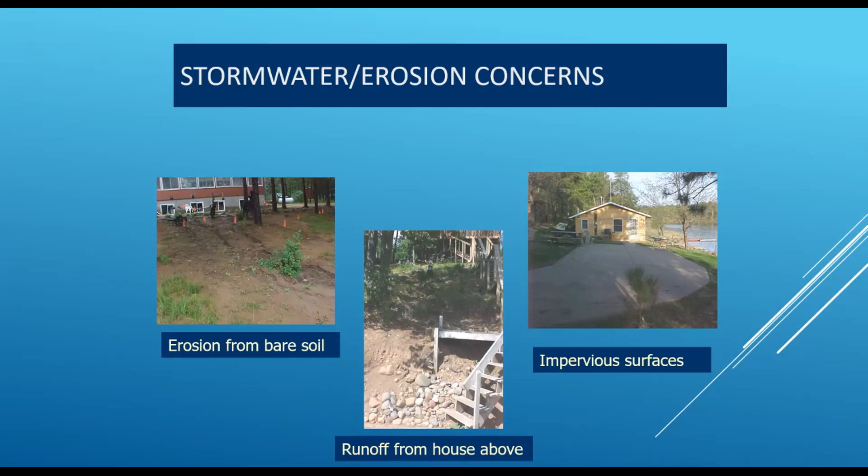There's one that was part of a new construction, and you have to think about when you do some building, or I should say some additions in this case, it wasn't specified that the contractor did any type of soil stabilization, and they did what they were supposed to. They left, and here's what we get. And this completely accelerates and has a real issue, and it needs to be stabilized quite radically because it's pumping a lot of stuff to the lake. Next slide, please.

And these are a couple of different examples of what you can do without erosion control, and it really can cause a huge, huge problem. There's some major gullies, and it had some major costs to fix those up. Next slide.

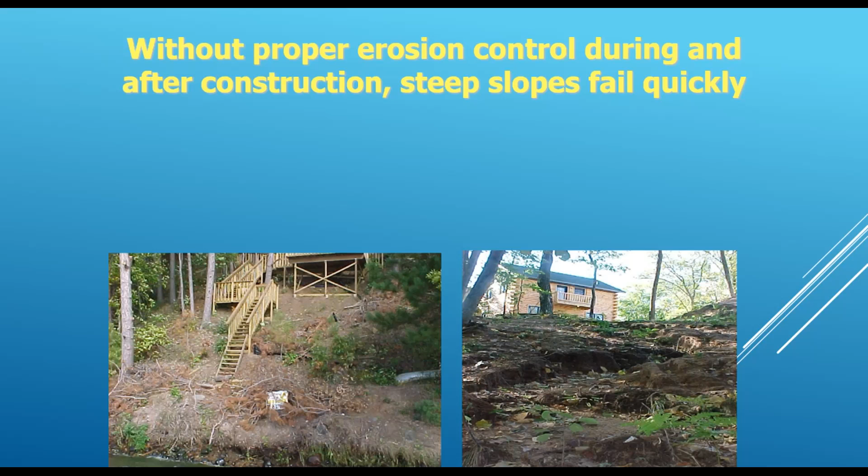This is just a plain old simple runoff on a driveway, and it's a well-established cabin, been there for many years, but there are issues and there are volumes of water coming from above that really should be intercepted and moved off into a place where the vegetation can use up the nutrients and the water can infiltrate.

And I will also mention, I don't have a slide of it, but when you have an excessive amount of runoff or you do a little extra fertilization or you have bare soil, you can actually create a mini algae bloom in front of your property. My guys have been out on the lake. It's amazing. They'll be coming along and the water column will be clear next to shore, and then all of a sudden you hit algae. Well, what's there? Oh, that was a property line. Then there's algae for 100 feet. New property line, the algae stops. So it's very, very important to think about what you can do above your cabin and above the lake for stabilizing that for water quality. Next slide, please.

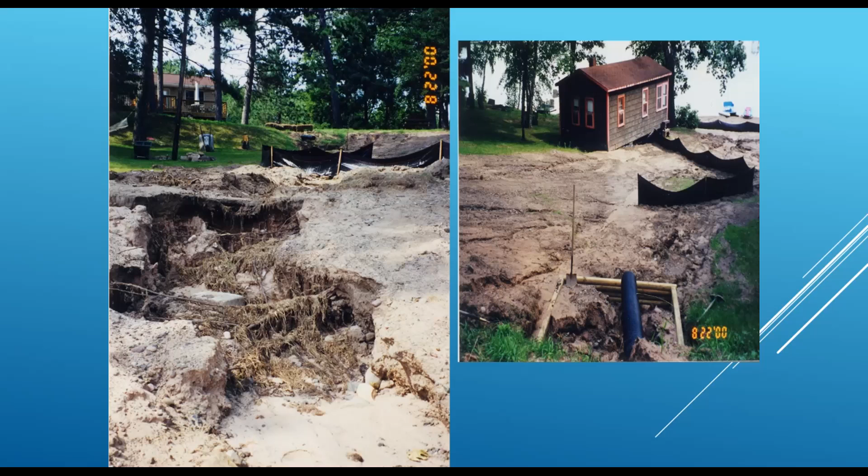This was a dandy. The guy thought he was doing the right thing. He put an addition on his house. He had a ton of hard surfaces, and he thought, oh, geez, I'm going to put it all together in one collection point and then just run it down to the lake. Well, that was the result when you put too much volume together. It was not a pretty sight, and he spent thousands of dollars fixing it up because he didn't think about what he was doing ahead of time. And as you're adding hard surfaces, you really want to be cognizant of that increased runoff.

And by the way, Burnett County, along with Bayfield County and a few others, did a book a bunch of years ago called Controlling Runoff and Erosion from Your Property, and that should be on Burnett County's website. And we also did one about buffer restoration. It's on there as well. Next slide, please.

Yes, next one. And here's just a few solutions to think about. The one on the upper left is a blacktop diversion that goes into an infiltration basin down there, quite decorative, and it's a little bit of a rain garden and diversion as well. The one on the upper right is basically an infiltration basin, but it's also taking care of the roof water as well. And of course, the one on the bottom left is a brand new installed rain garden.

And the one on the right is an infiltration basin. And that is not a bear, that is just a dog. But it works real well. We do a lot of them. In fact, we can bury infiltration basins so you don't even know they're there. Next slide, please.

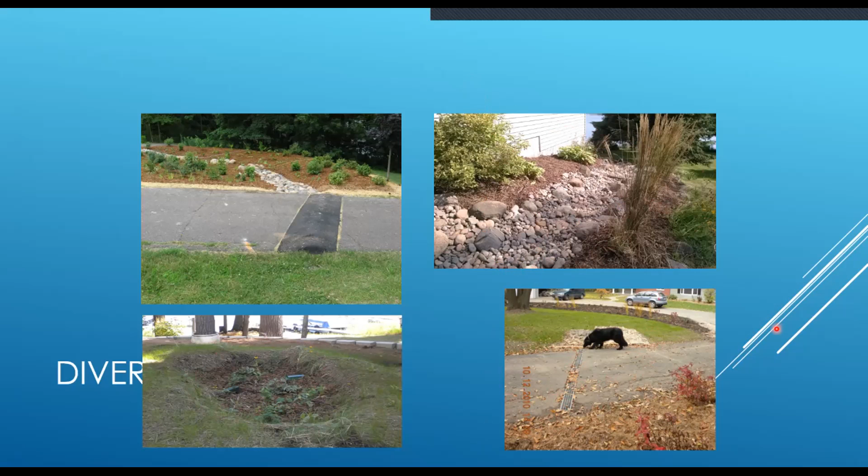And this is just a rain garden where we captured all of the water from the cabin going down towards the lake. And because they had a gully that was starting just below this, we basically just stopped all the water there. And by the way, this is only the year of installation, so it's not really very pretty yet, but believe me, this was absolutely beautiful after it got through. So next slide.

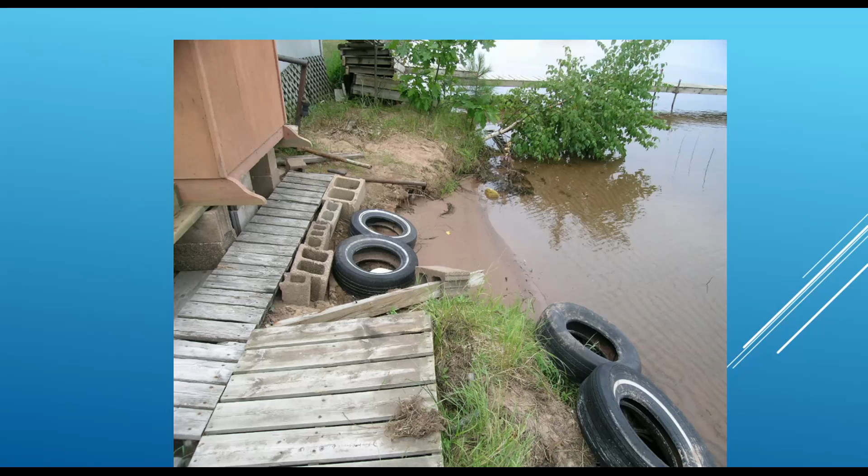This is the other type of erosion that we look at, and what's been discussed extensively, and what causes most of the problems when you get high water. In fact, in Burnett County, we have mostly seepage lakes, so this is a large area of the erosion problem that we deal with. When seepage lakes come up, they have a tendency to rise and fall quite dramatically, and this is what we get when they come up. And this is really the issue that we're going to try and look at.

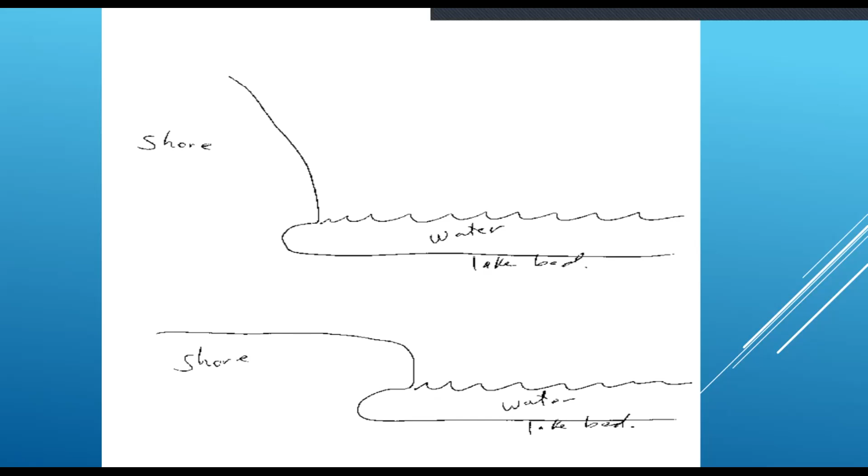And this is just basic rock, and it's exactly what we've been seeing before and what you saw in Stacy's presentation. Just basically fill in the rock, and it doesn't show it as well as I'd hoped here, but put filter cloth behind and get that indentation full of rock, and that's going to really stabilize your shore and hold everything in place.

And with native plants above it, and ideally, if you can either leave it alone or put some native plants, as we discussed earlier, within the riprap itself, that makes it much more, I call it, environmentally benign, because it allows creatures to basically move up and down. They can't move through like they usually would, but at least they can get over it if there's some leaves and stuff in there, so it's fairly smooth. So that's kind of what we're looking at there. And next slide, please.

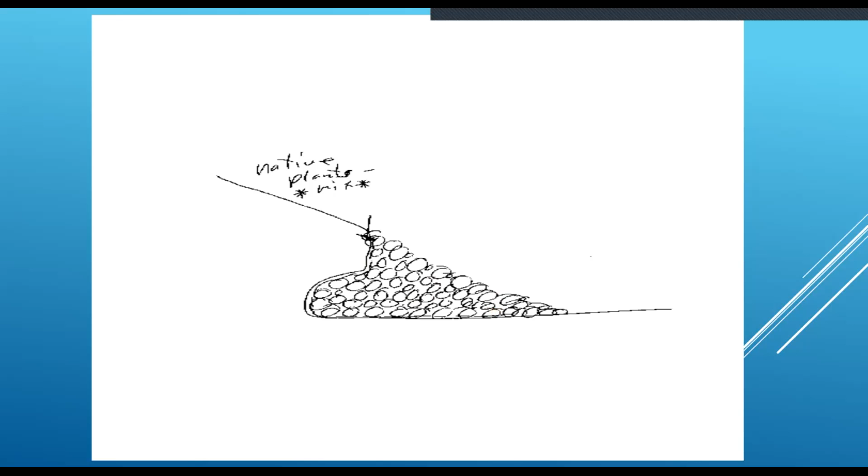And this is just a DNR drawing. Dan Harrington will talk more about this on the same type of thing. But this is actually a sample drawing of what you would do to check and see if you need a permit. If you do need a permit, which, not to steal some of Dan's thunder, but it has to be done to standards, although the permit process is fairly liberal right now.

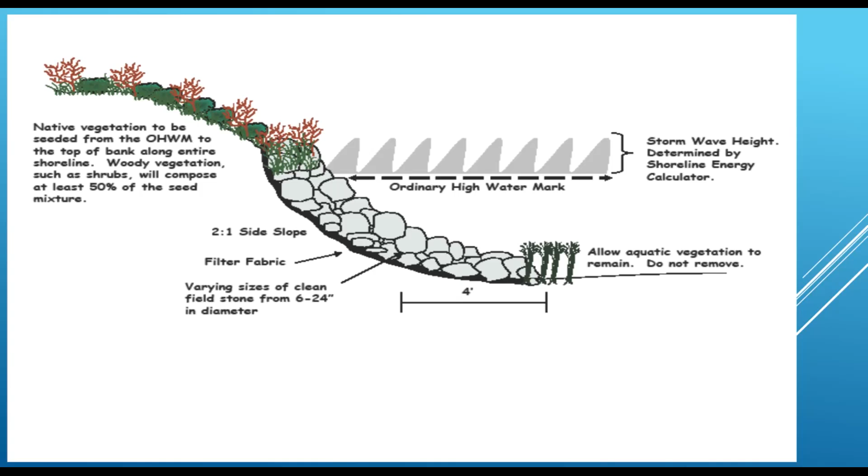But that's really important to do the native veg above. That's just as much, if not more critical than the rock. Rock is expensive. You want to use as little as possible, and native vegetation is much cheaper and it holds things in place just as well. So I would encourage, if you have erosion, to just do a small toe. Next slide.

And of course, this is the one you saw earlier, and you're going to see it later: what's the difference? The one on the far left is your lawn grass, like Kentucky blue. Yep, and that's all that is for a root system, and all the rest of those are the various natives, and that's why the natives are so good at holding everything in place, because they have this incredible mix of root systems. And by the way, this is only the prairie plants. This doesn't even include shrubs and trees and stuff like that. So it's pretty impressive what they can do as far as holding soil in place. Next.

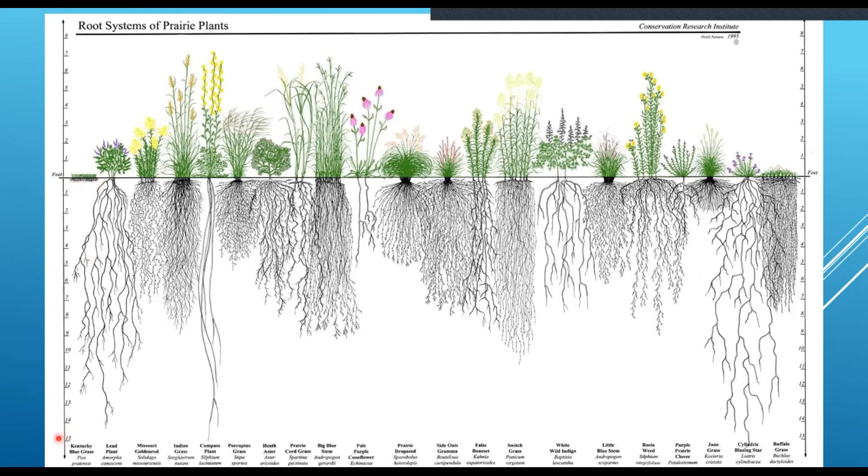And last but not least, we have a program here, which Madeline alluded to earlier, called our Shoreline Incentive Program. What we do is we actually reward landowners in Burnett County for doing the right thing and following shoreland zoning. They sign a covenant that says, I agree to follow shoreland zoning, which basically means it's an intact 35-foot natural buffer, excluding your viewing access area. And then we give a little cash up front, and then we do a $50 a year property tax credit after that.

And it's been very well received. We have, I think, about 850 parcels in the program right now, and well over 50 miles of shoreline that's protected under this program. And that is about one more slide, and I think that should be it for me.

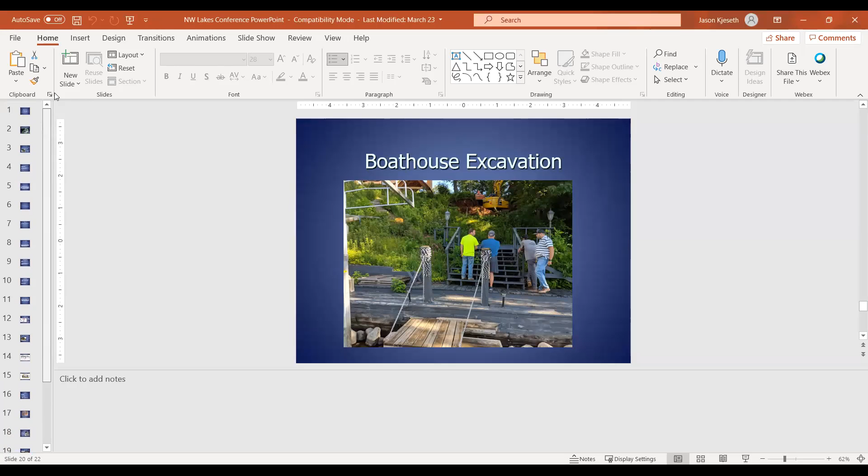All right, so Dave did a really good job showing a lot of examples. I'm going to go over some of the shoreland zoning standards and what we see a lot of too, and how the zoning laws in Polk County affect the erosion potential that a particular use of a property or development might cause.

A lot of our developments go back to the 1910s through the 1930s, when a lot of our class 1 lakes were originally platted. At that time, we had a 16 by 20, 1-bedroom or 2-bedroom cabin that was often built close to the water. We had a lot less development pressure at that time. Now we're seeing a lot larger houses and still wanting to be closer to the water. So what does that do? It creates more runoff from the roofs, carrying the phosphorus and nitrogen nutrients, and also possibly soil into the water.

We also have less scenic beauty over time, as people are mowing their yards; we're losing vegetation around the lakes, and we lose tree cover because the trees are no longer in the woods and protected from the winds and storms as they might be if they were in the woods.

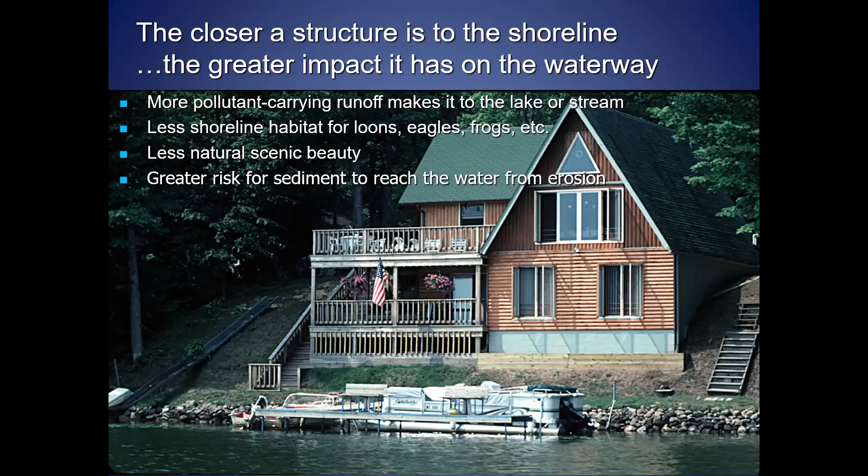It's been proven on many different bodies of water, and in Polk County we have an example of that as well: lakes that are clearer and have better water quality and uses of the water have higher property values.

It's been proven that if the Secchi disc reading, which is the water clarity of the lake, drops by 3 feet, that's where you start to see the impact on property values. What can limit or contribute to the Secchi disc reading is some of that erosion because of that sediment. A lot of times on a new construction site, you might even see a sediment plume out in front of the property, like Dave was saying.

You can also see an increase in that based on the amount of water coming off the roofs and the increase of the temperature in the lakes. And whether or not they use erosion control measures around the new site or the development, that's another big contributing factor. So you can see this one here has got some silt fence up. It doesn't look like it was installed properly because the silt fence needs to be trenched in at the bottom. They haven't maintained it. The silt fence is falling over. Basically in that picture, there really is no erosion control that's helping.

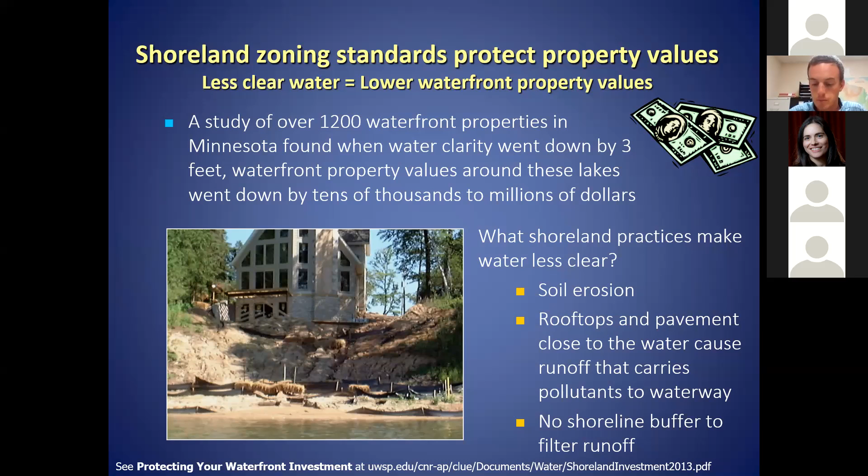So in shoreland zoning, the DNR has an administrative code called NR 115. This was developed back in the late 60s as the minimum shoreland zoning standards. A county back then could be more restrictive on these 7 bullet points. In 2015, Act 55 came along and stated that a county can no longer be more restrictive on any of these. So if regulation proposed by a county does not fall underneath one of these 7 things, then the county can regulate it. For example, side yard setbacks, maybe the color of the siding of a building, maybe where the building is located, except for like a dwelling with the building setback.

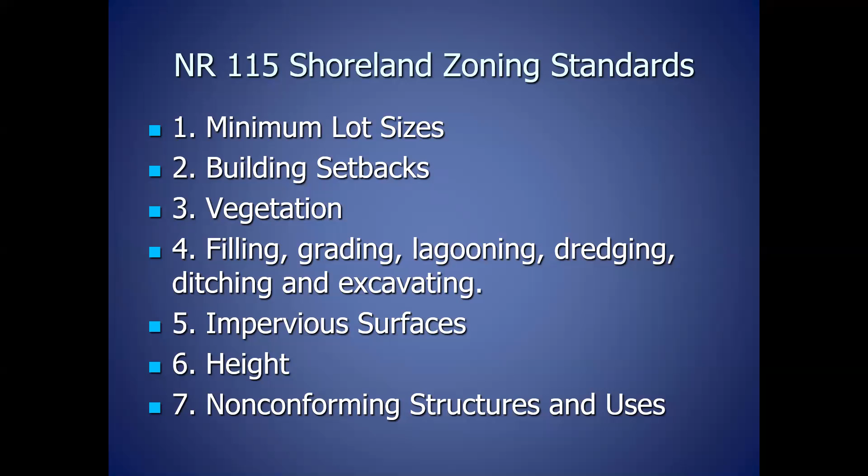So if we look at these 7 things too, it's very linked into the erosion and the contamination that could happen to a lake. The smaller the lot sizes we have, the more potential we have for more development and less buffer area, even in between the lots. So that could have an effect on the erosion. Setbacks, I got a picture of that, but definitely the closer you put that runoff source or that building to the water, it's just going to limit the amount of space and various soils that are going to have the ability to absorb that runoff before it hits the water. So setback can be huge.

There's been a lot of studies done that even the 75-foot setback that's required under NR 115 is generally not enough if you have mowed grass, from stopping that water getting to the lake. Dave mentioned a slide about the type of vegetation that you have in place and how the root systems can affect that runoff, and also the amount of water that's taken up. Our grass right now, we're pretty dry down here. It's not taking up any water because it's got a really short root system, whereas some of those deeper rooted plants are going to be able to keep going and not die off.

Filling and grading is something I think has relaxed a little bit over the years, because of kind of the administration of it. The building inspector, or the UDC code, and when I say UDC, that means Uniform Dwelling Code inspector, is the one that's in charge of administering the erosion control on a new dwelling site. And then for sewer systems, the sanitary code also has some erosion control standards in it. But other than that, we're having to allow boathouses now, and extra filling and grading activities being allowed on steeper slopes can definitely have some impact.

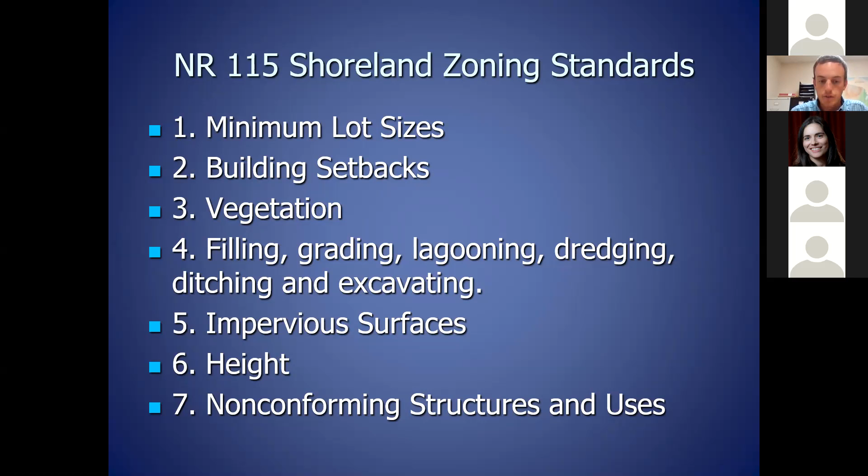So these are some changes that have happened in the last year. A shoreland zoning ordinance, as I stated, cannot be more restrictive than NR 115. Also, as part of Act 55 in 2015, a county can no longer require the establishment of a vegetative buffer on previously developed land. Now, when we say previously developed, that doesn't mean it necessarily had to have a house or a cabin on it.

When they're talking about vegetation in the buffer, that means previously cleared land. So in other words, if land has been cleared prior to the adoption of the shoreland ordinance in that particular county, that's previously developed, and it's allowed to continue that way unless the owner wants to reestablish it on their own.

The only time a county could really require an expansion in existing vegetative buffers is if that's needed in order to do some kind of development on the property, like the gazebo rule or the open structure rule, or maybe if they had too much impervious and wanted to add impervious to the property, then the county could use a buffer enlargement as a mitigation tool.

And the county is no longer able to regulate a lot of the non-conforming structures as it was in the past. In the past, a lot of counties required permits for maintenance and repair to those non-conforming structures. Now they're able to tear them down and rebuild them in the same footprint, and those are happening quite often.

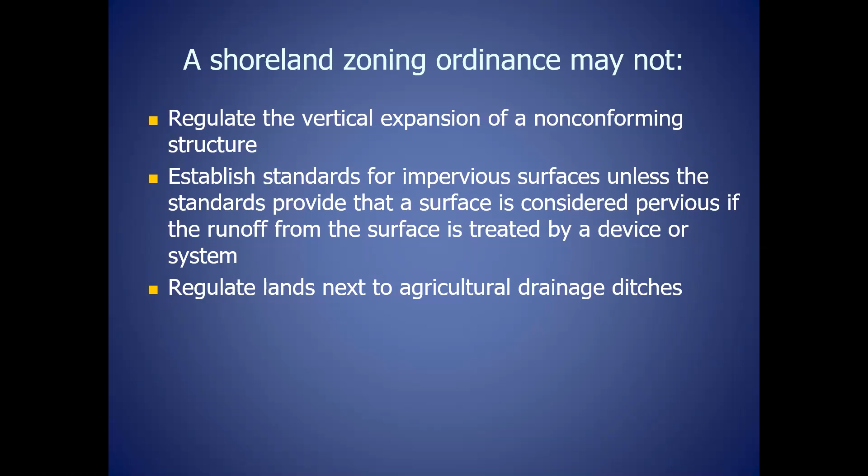So when we talk about vegetation down by the lake, these are for properties that would not be considered previously developed. They are allowed a 35-foot wide viewing corridor for every 100 feet of shoreline that they have. This is within that buffer zone, so within the first 35 feet of the ordinary high water mark. The viewing corridor can be split up or it can be contiguous.

So in other words, if you had a 200-foot shoreline property, it would be possible under the law to clear 70 feet wide in one chunk, or you could split it into two 35s or whatever combination you want. Again, we would allow installation of a buffer as a mitigation option for properties that are over 15% impervious, but it is not required.

This is something that I believe some of our lake districts around here, particularly on Deer Lake, have been very successful on, letting the residents that live around the lake know how important a buffer is. And I know the Healthy Lakes program has even had some incentives for financial help to get some of these plantings down by the water where they're going to help.

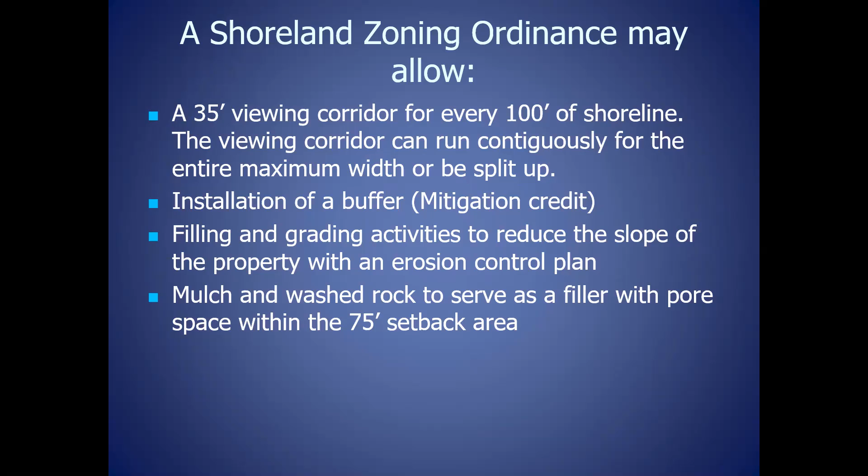So some important definitions have changed also within the last 5 to 6 years. Here is the shoreland setback area. That means basically the setback off the ordinary high water mark. The shoreline setback area is typically 75 feet, and typically everything has to be out of that shoreline setback area as far as structures go, except for the exempt ones that I have on the next slide.

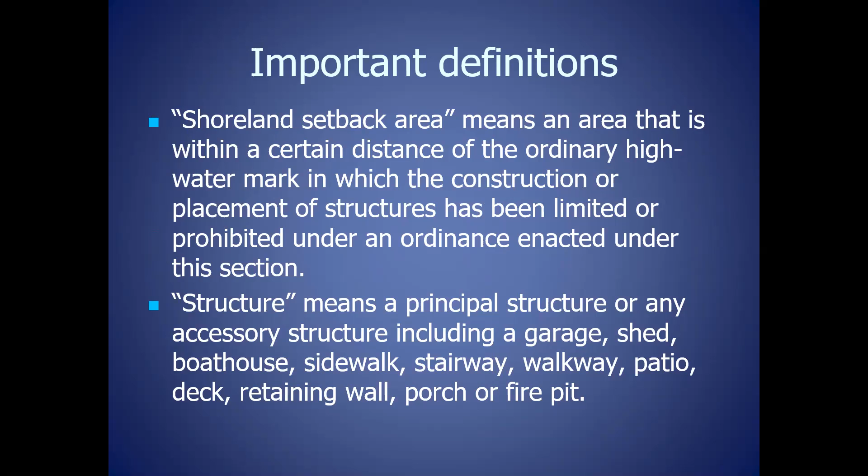But basically a structure means any garage, shed, accessory building, sidewalk, stairway, walkways, patios, retaining walls, porches, and all these structures would require permits in most counties in order to build them. And this is just saying that they all are required to meet the 75-foot setback. There is one rule that exempts this.

We have our exempt structures, but then we also have setback averaging, which is when we can average between 2 adjoining dwellings. So if you have a property in the middle and you have a lot on each side, you can take the average setback of your 2 neighbors' dwellings, and that would be your new conforming setback. So if one's at 40, one's at 60, the lot in the middle could build at 50 feet for their dwelling, and they would actually be considered conforming, not non-conforming.

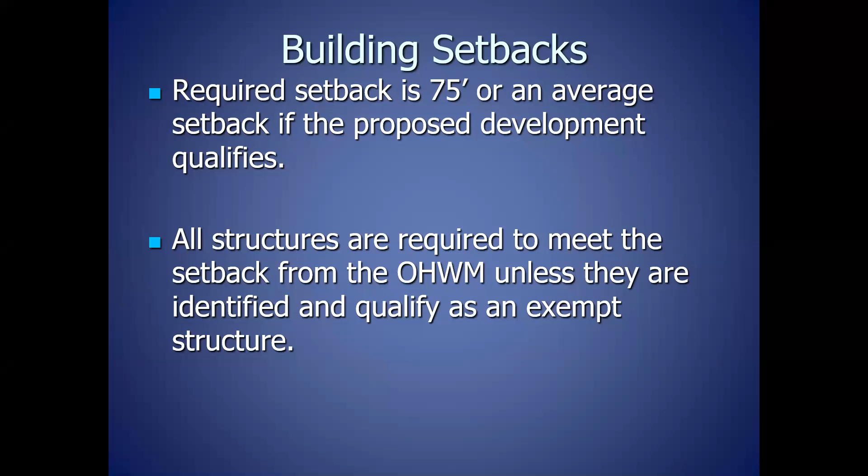So here's a list of the exempt structures that can be within the 75-foot setback. A boathouse can be, and the DNR has given us the guidance that a boathouse can have a little bit of a setback off the ordinary high water mark, but the setback required by the county cannot be prohibitive of using that building as a boathouse. They have to be within the access and viewing corridor, which is 35 feet for every 100 feet, and cannot contain plumbing or be used for human habitation or sleeping purposes.

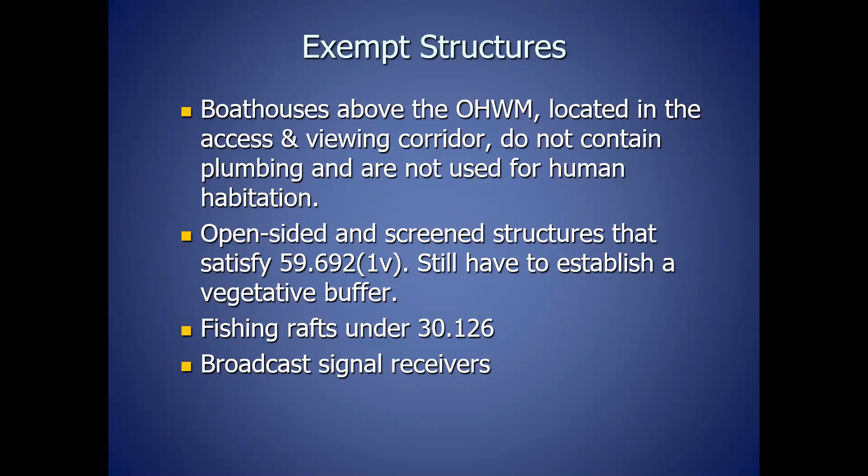The open-sided or gazebo structures can be done as long as the house is beyond 75 feet from the water, and the structure is at least 35 feet back from the water. So between the 35 and 75, they're limited to 200 square feet. So another good opportunity for people to be able to enjoy their property, but this is an issue sometimes because we've got hardscape at 35 feet back. Fishing rafts and TV broadcast receivers can also be placed within the setback area, and utilities would be exempt.

Walkways and stairways down to the water are allowed, but they have a maximum of 60 inches wide, or 5 feet. Typically there's no standards, at least in Polk County, that would require them to be wood or concrete. We do have some that have grass paths or even some trap rock paths that are limited to 60 inches wide. But we have some concerns when we start putting the trap rock if we have steep slopes.

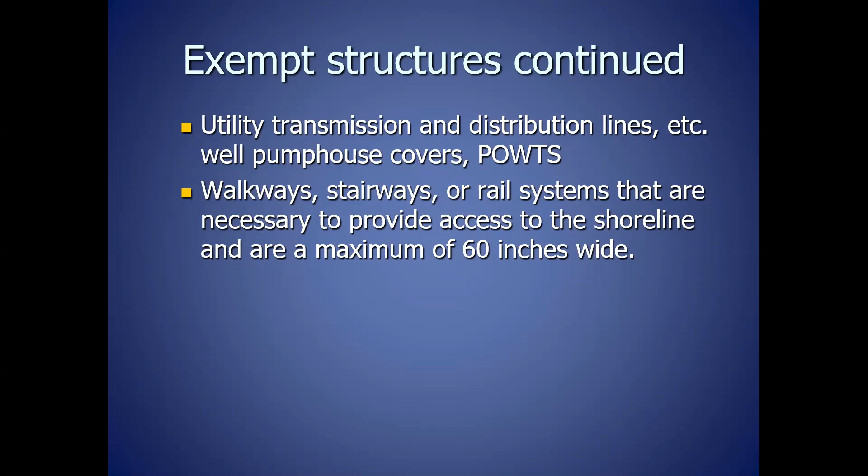So this is just kind of a picture of what a typical lake property might be. You can see we've got the 35-foot setback there in the darker gray. And then we've got our 75-foot setback, which is where our building and everything is supposed to be located beyond. Anything within that red circle, that is the shoreline setback area. Anything that's in that gray area, that's called the shoreline protection area or buffer area. So that's what we're looking at when we're looking at buffers.

And you can see in the picture, they have the 35-foot viewing corridor, which can be grass right up to the water. Again, that's probably not the best for the erosion though. So as Dave was showing, you can have a lot of movement in shoreline with ice ridges and stuff if you just have grass.

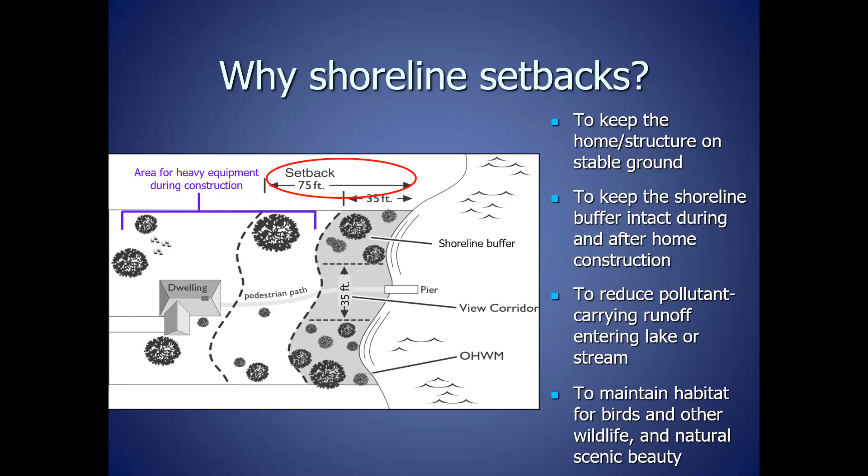So a lot of times they can have better habitat if they have some natural plants around. They can see more birds. So there's a lot of benefits to having other vegetation besides grass between the lake and the house.

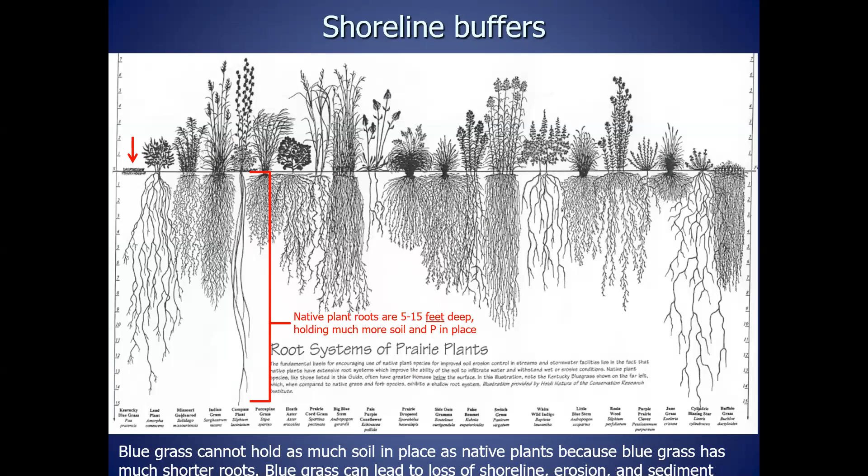This is basically the same slide that Dave showed. You can see just the various roots. I'm not going to go into detail on that, but there's a lot of different options for native plants that can actually be very nice looking and also do a very good job at stabilizing the soil and providing that habitat and natural scenic beauty.

So this is just kind of a chart. If we're looking at controlling erosion and runoff, you can see that'd be the second yellow bar down from the top. And 75 feet is not really adequate for that. 100 feet would probably be better. Nutrient control, as far as the phosphorus and nitrogen, 75 feet is about in the middle there.

But as far as any sediment control, that really varies depending on what practices are in place, because if you did have all the proper erosion control, using erosion control matting and all the other methods, you can definitely be closer to the lake and not have the same impact. But if somebody has nothing and they're 400 feet away, they could still be impacting and providing a lot of sediment into the lake.

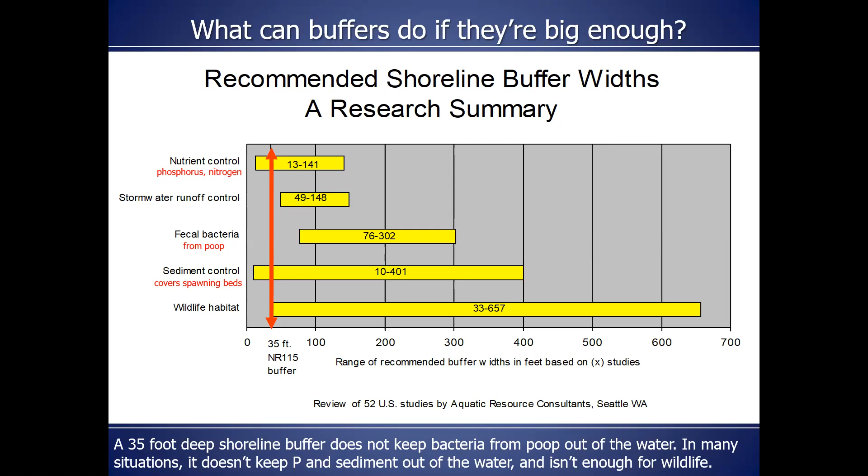So one of the things that we end up working with the most is infiltration, because a lot of our properties have been developed for a long period of time. Like I said, the little cabins are getting into homes, and even large homes. And so often we're exceeding the 15% threshold.

And we actually have some infiltration pits, or what we call full detainment, which helps in many ways, but basically it reduces the amount of runoff coming off the property, allows for soil to treat the water before it gets into the lake, and reduces any erosion, because typically these infiltration systems are close to the source of the runoff. They can be very long-term because they can be subgrade.

We don't have to worry about leaf litter and other soil particles plugging them up like some of our pervious paver systems. They can require minimal maintenance, and they're pretty economical because a lot of times it's just rock and doing a little bit of digging or planting.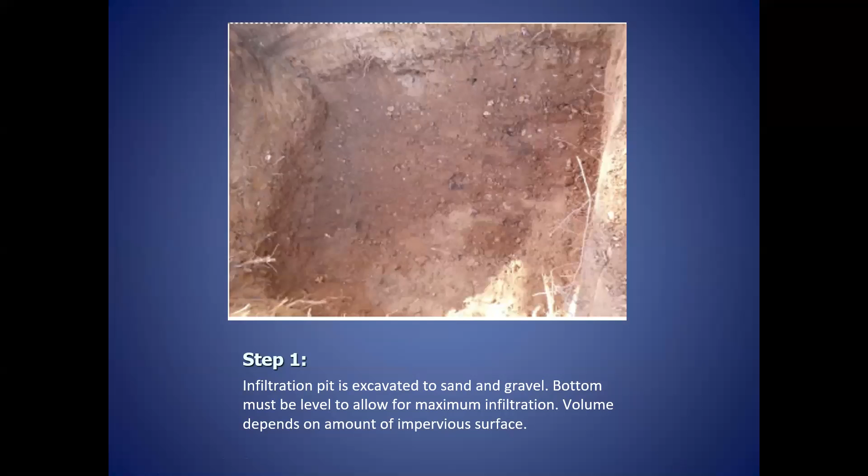And typically, for septic systems, it requires 3 feet of good soil in order to fully treat that wastewater going down. So this would be the start of the pit, and you can make it basically any dimensions, but just be conscientious about where your groundwater level is, because you can change the actual dimensions and depth of the pit to accommodate your site.

Or like I said, if we have that really large storm event, we can have some water leave. So basically this is anywhere from 3/4 to 2 inch clean rock. And we like to see a filter on it to try to prevent any other foreign debris from getting in here. But this is probably not the best place to put it. It's probably better up closer to your gutters, or your downspouts where they're going into this.

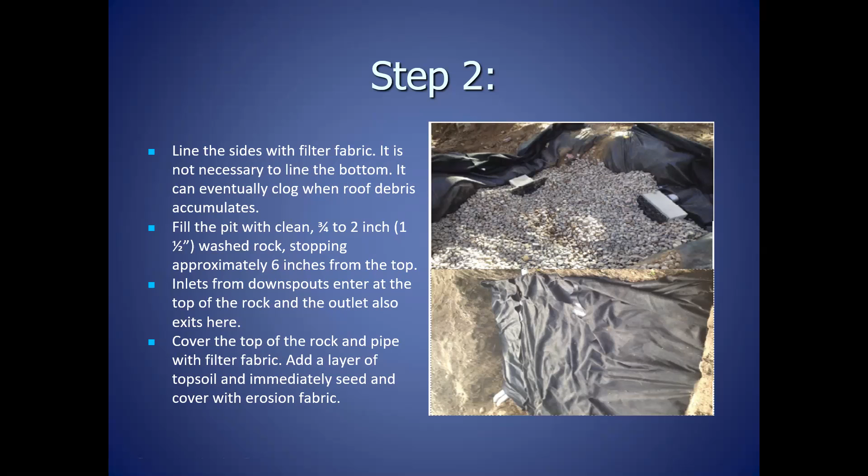So these can be left completely open if they want to have that in their yard or their landscape plan. Dave had one that kind of showed like a dry run swale of rock. They can look very nice. Or they can actually cover this up with filter fabric and put a light layer of black dirt over it and seed it so that it can be all subgrade as well. So they're a good option, fairly economical, and they don't take up a lot of real estate. So that's what I have for infiltration pits.

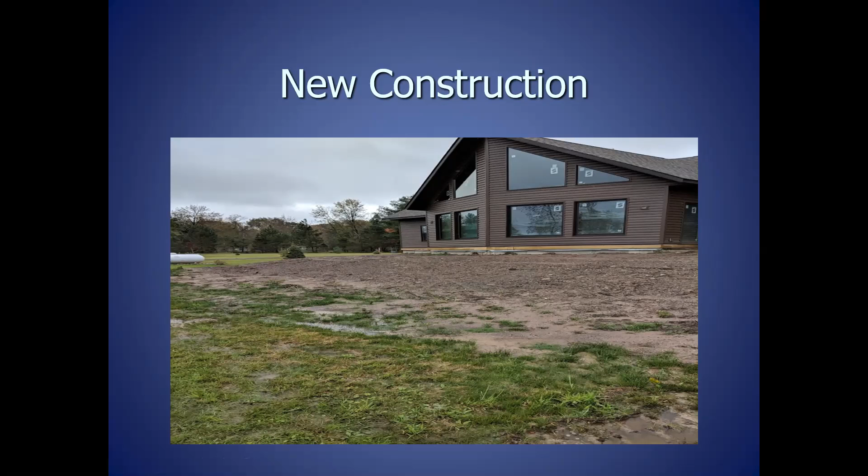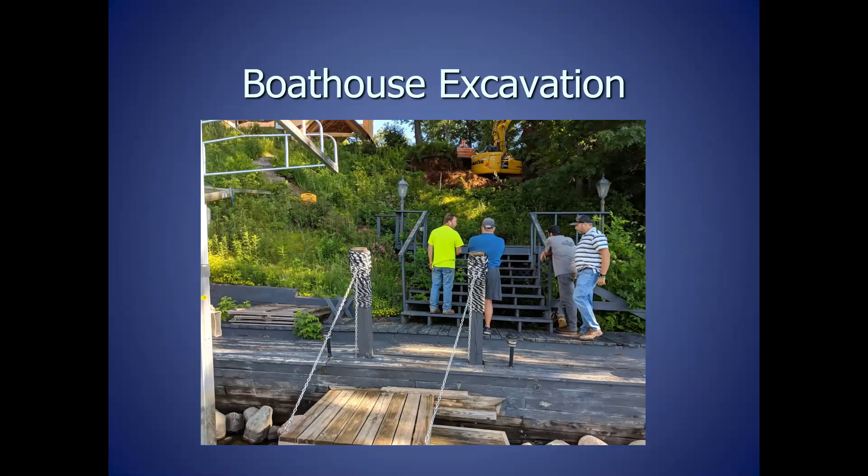Okay. This is one of those steep slopes, like I mentioned, with a boathouse, that is now allowed through the DNR. So here's a slope that's probably 30 to 40 feet. We got 2 different trackhoes that are moving it up the slope just because of how steep it is. And it's something that is now allowed, so we have to address it appropriately. We would suggest the silt fence here, which isn't installed yet, but we do have a lot of natural growth here. And then they would put erosion control blankets around that right away.

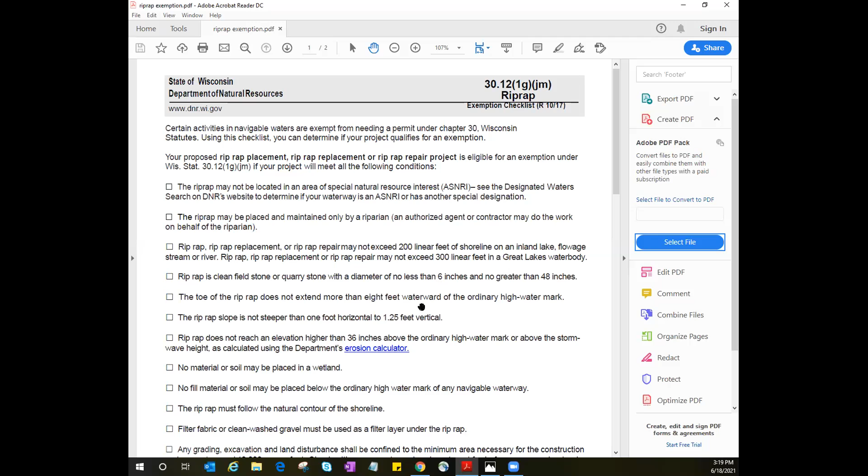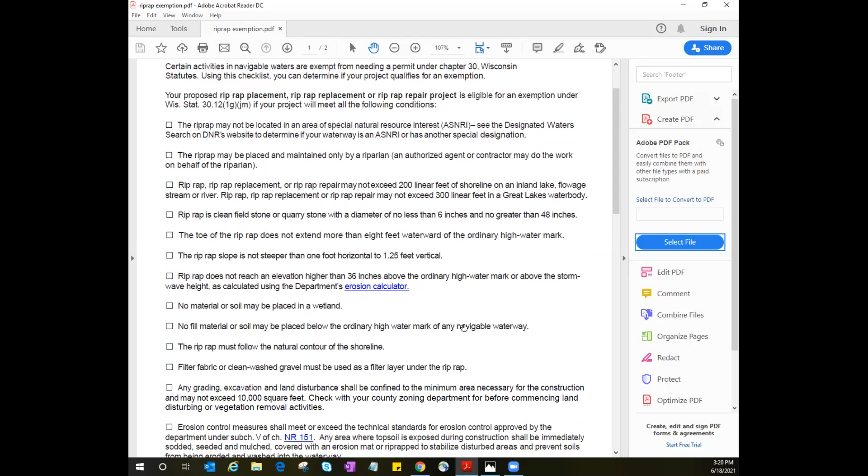The main kicker here is that the rock cannot be placed in an ASNRI water, and that stands for an area of special natural resource interest. And the other big thing is that rock riprap cannot exceed 200 feet on any inland lake and 300 feet on the Great Lakes. And the exemption actually allows for rock larger than a permit. It allows for rock to be up to 48 inches, and it allows the rock to go out further than a permit normally would.

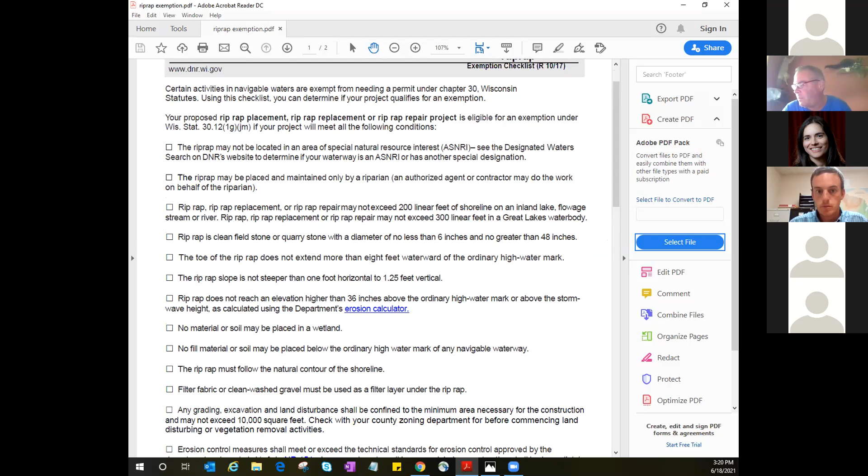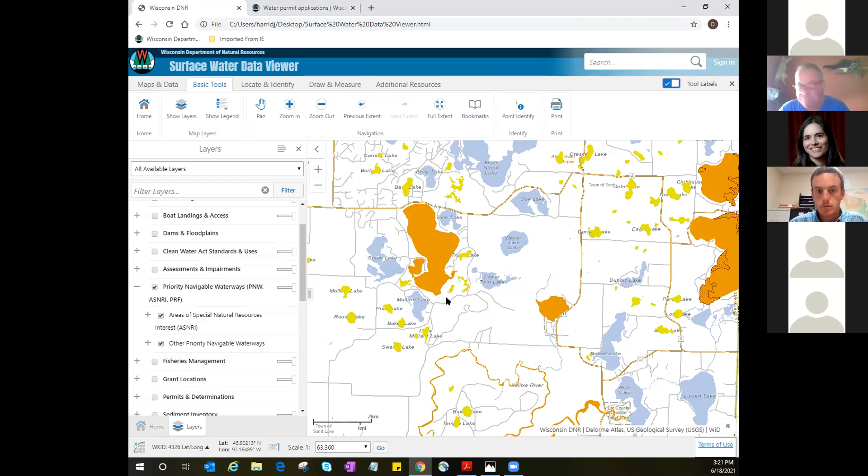So if you are eligible for an exemption, that form I had up on my screen does not need to be submitted anymore. If you meet the standards, you're eligible to put rock riprap. And unfortunately, you can see a lot of these smaller lakes in Burnett County are not ASNRI waters and are eligible to place rock riprap. Normally these smaller lakes don't need it, but the law does allow for that under this exemption now.

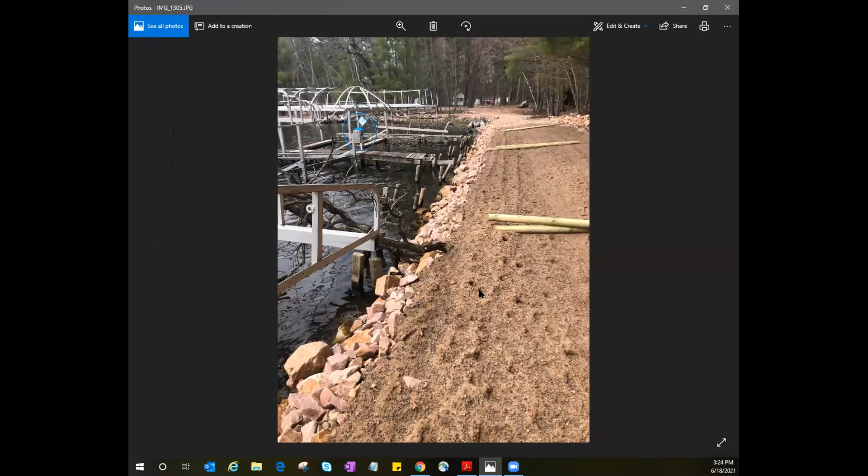This is a photo of something that just happened last fall. This individual thought he was exempt, and that rock riprap is actually on the lake bed 15 feet, and we're working with the landowner in removing a lot of that rock.

I know I've only got about 5 minutes left, Madeline. Do you have other questions that folks have? Yeah, actually, I think this is a good segue into a question from our last session where someone had rocks falling out of their shore. It's a naturally wooded shoreline, but because of the high water, it's undermining some root systems. The rocks are 4 to 10 inches in diameter and have now moved onto the lake bottom. Can they move those rocks back towards their bank, or is that permitted?

Nah, that's actually not allowed. The naturally occurring rocks do provide spawning habitat, especially for walleyes. The department has spent, the lake associations too have spent considerable amount of money on constructing walleye spawning reefs by hauling in rock on the ice for walleye spawning beds.

And you really want to use a bigger rock, 18 to 36 inches. And most importantly, the filter fabric should be placed behind that rock as well, so that the waves don't take soil back with it as it penetrates the rock. Okay, so it sounds like a situation where you might want to contact someone to do a site visit, is what I'm hearing. Right. Okay.